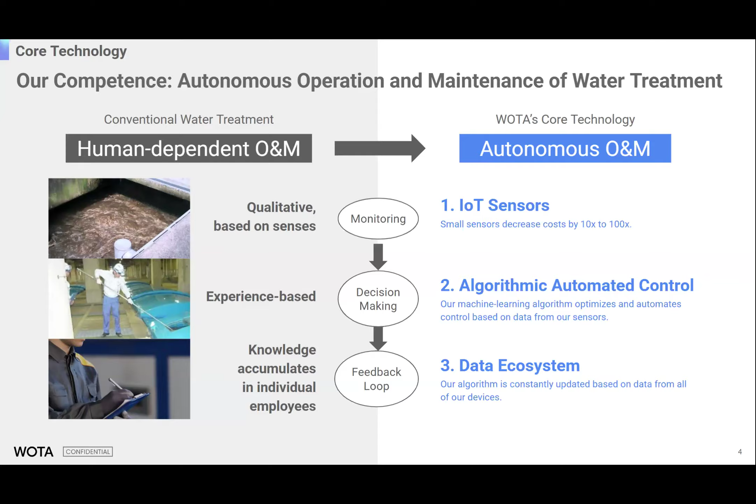We have two main business lines of products. One is for potable water business, and the other one is for residential water business. I will start with the residential water business because I think this is the focus today, but I'd like to take some time in the presentation to share also our experience with our potable water systems.

So in terms of residential water, we develop small scale water recycling systems. They are very small, the size of a household. They are designed at the moment to cater to the needs of a family, and a family in Japan is on average 2 adults and 1, 2, or maybe 3 children. So the capacity of our small scale water recycling system is around 1 cubic meter per day.

What we design is a system that has 3 different cycles. One for toilet water: the water from the toilet, the black water, is treated and reused for the flush only. Then we collect in a separated cycle the gray water, coming from the shower, the bathroom, the laundry, and also the kitchen. We treat it to a level that meets the Japanese drinking water quality standards, so it can be reused for the exact same usage, including the kitchen and the shower.

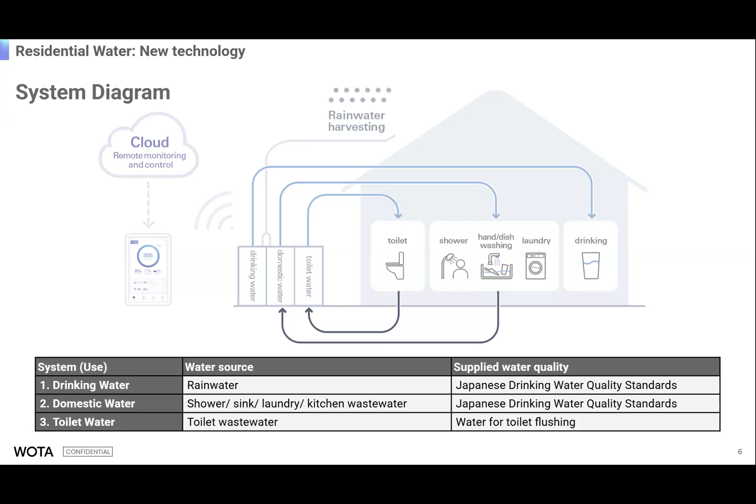And the last module, separated as well, is for drinking water. We use any source of water available near the house, mostly rainwater harvesting, but we can consider other sources like groundwater, or sometimes water coming from tankers. We treat it as well to meet the requirement for the Japanese drinking water standards. This is the concept of the residential system.

When I start with Japan, although the situation seems different from the Caribbean, it has a lot of similarities in some ways. Japan is a country with 125 million inhabitants, and out of them, 20 million, more or less 16%, live in cities with less than 100,000 people. In these cities, the cost of infrastructure is way too high compared to the water tariff, so it's very difficult for municipalities to maintain and renew the network, especially considering that the population in Japan is shrinking in many places.

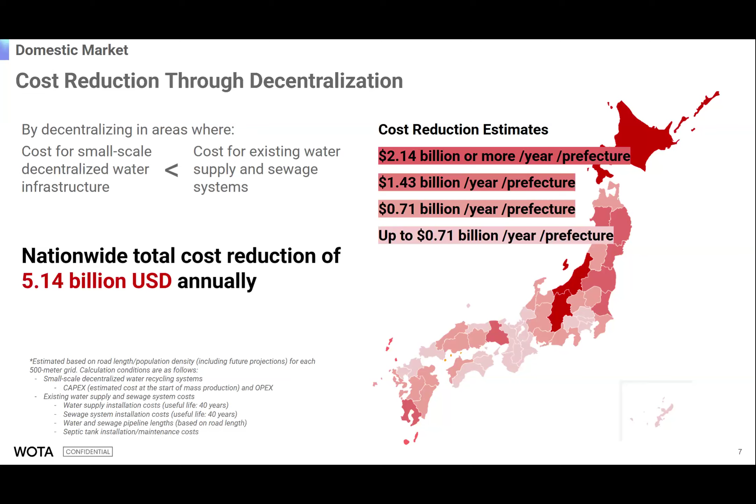So for those who have been in Japan, if you go out of the big cities, it's very rural and less populated. The cost savings we evaluated for the whole country can be more than $5 billion per year.

So those were the projects we are doing in Japan. We started to explore overseas. The opportunity we had is that we were selected by the Earthshot Prize, the Royal Foundation of Prince William, and this gave us the possibility to connect with many countries, including countries in the Commonwealth community. This is how we made the connection with the government of Antigua and Barbuda.

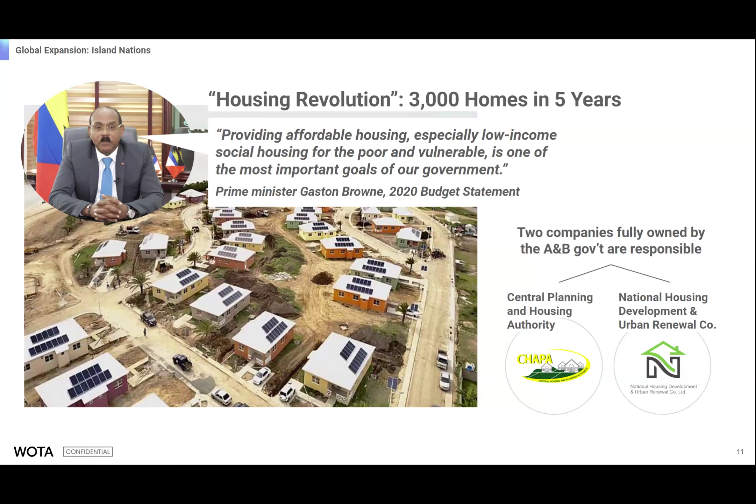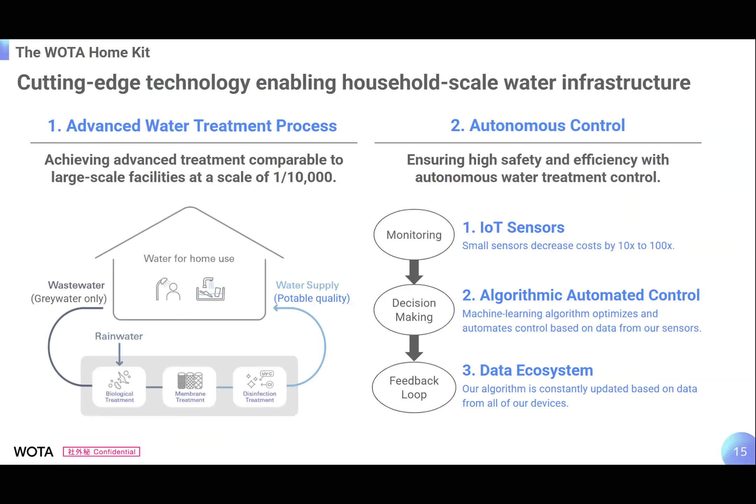In Antigua and Barbuda, we focus mainly on gray water. We haven't installed yet the system for toilet because it's a pilot, and we go gradually to make sure our solution fits with the configuration in Antigua and Barbuda.

The way it's installed: in Antigua and Barbuda, houses have cisterns that are very large, more than 5,000 gallons, used to supply water in the toilet and bathroom, and connected after that to septic tank and soakaway. But in many places, they face the challenge of working properly with the septic tank and soakaway, due to the nature of the soil.

So what we did is we adjusted to this local configuration. By using recycling of gray water, we expect to reduce the size of the cistern and the soakaway so the owner of the house can make savings on the cost of this equipment, connect bathroom and kitchen to our system, recycle, and just use the septic tank and soakaway for the black water coming from the toilet.

This is how we started the three piloting in three different houses. The first one has been in operation since July 2024, the second since November 2024, and the third in December 2024. I think Nerissa and Krista will be able to develop much more during the Q&A session for those three different pilots. But we already have more than 6 months of results in the first house, and also very encouraging results in the two other houses.

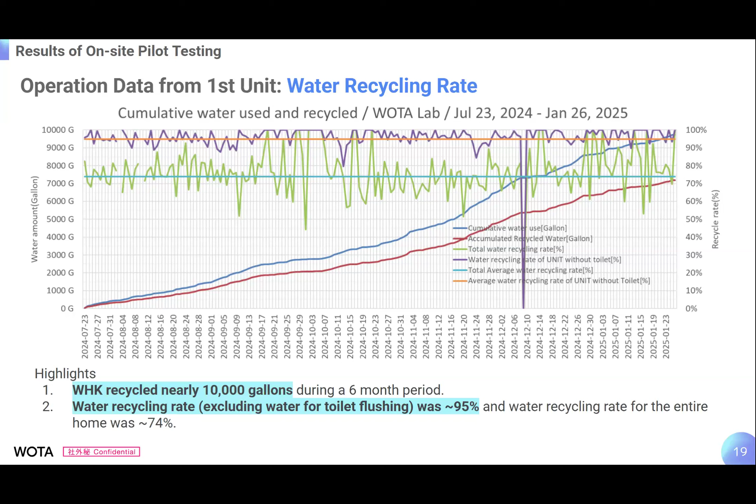We've conducted surveys since the beginning of the pilot, and very recently we extended the survey to, I think, many households. I will ask Krista later to confirm the number of houses, but we have a very strong interest. We were worried about the social acceptance of gray water recycling, but actually the interest is very positive according to the tests that we've done. So we are confident that the system would be adopted at a larger scale in Antigua and Barbuda.

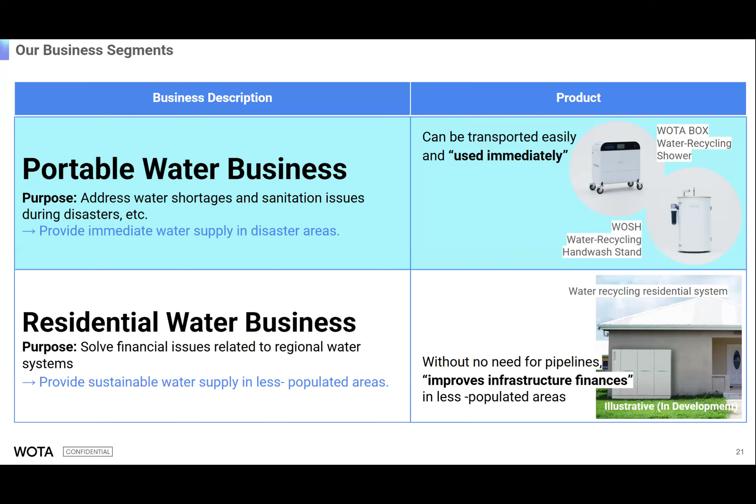Yes, that was for the residential water. Now I will move to the portable water business. As a startup, we always had this vision of using small-scale water recycling systems for residential use as a decentralized infrastructure. But to start, we addressed a very specific need in Japan with 2 systems for small-scale water recycling that are portable.

We developed, during COVID, this system called WOSH. The capacity is much smaller, only 20 liters, but you can recycle the water more than 500 times, sometimes until 1,000 times. It's a portable water circulation hand wash stand.

We used it during COVID because in many places you would have this need for hygiene measures, and we wanted to support the country's measures to provide a point to wash hands. It can also sanitize and sterilize the phone, because we use the UV lamp that is used in the treatment as well for sterilization of the phone.

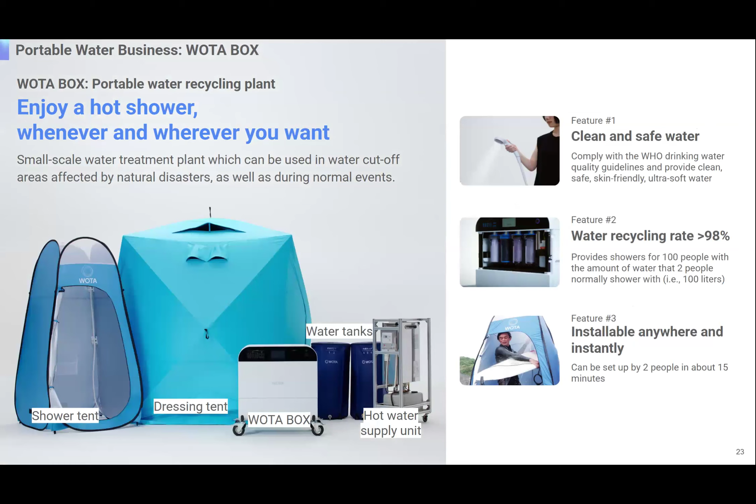We also have this system for shower recycling. It's a portable system that allows showers installed in tents to be used anywhere to recycle the water. The capacity is 100 liters of water that can be recycled 100 times. The treatment train for both systems is mainly filters and membranes, with sensors embedded in different parts of the treatment that allow the system to work autonomously.

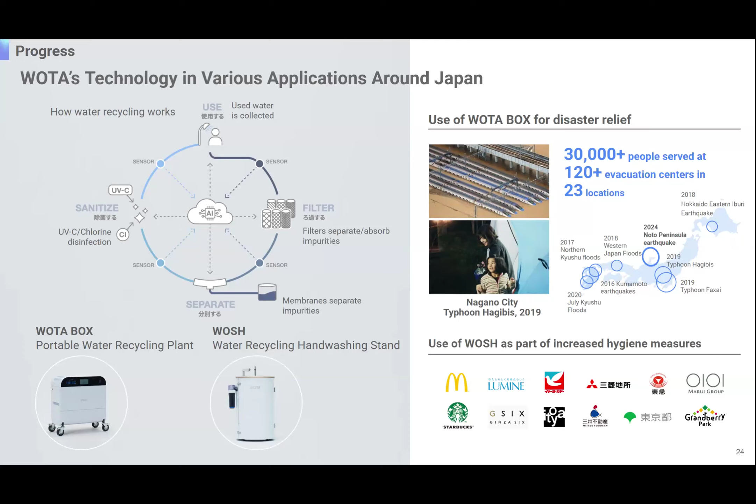The system has been used in Japan, mostly for disaster management. Japan, like the Caribbean, has many natural disasters - hurricanes and earthquakes - and unfortunately these create very strong damage on municipalities and infrastructure. Last year we had a major earthquake in the north of Japan on January 1st, in a peninsula called Noto Peninsula. The population there is around 300,000 inhabitants, and more than one third were majorly affected.

What we did is help the municipalities in their evacuee centers. We deployed 100 WOTA BOX systems for shower recycling and 200 for hand washing. We installed them in evacuee centers and in hospitals to help the evacuees. We think the first need during disaster management for evacuees is mainly drinking water and food, but the second is hygiene - important both for physical health and mental health. So we supplied our system everywhere, and we had a mission at that time.

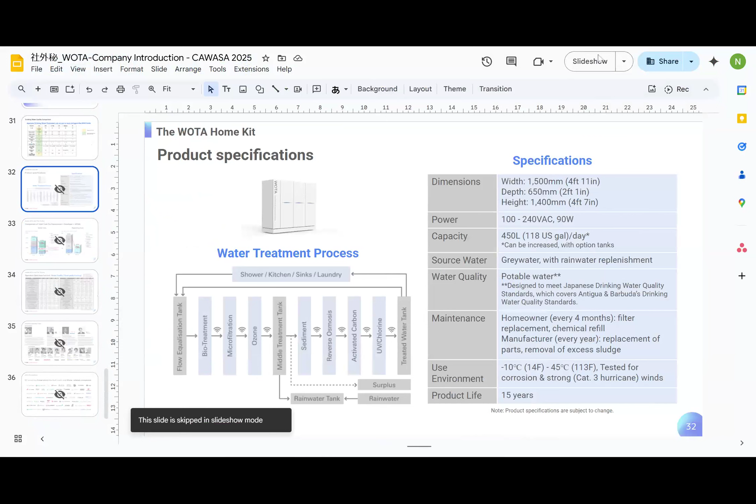Yeah, can you see the slide? Yes, yes.

So I'll focus on the treatment train for gray water recycling. We have the other module for toilet water, but the most advanced one is the gray water system.

We start with a collecting tank, which is a buffer at the beginning of the process. Then we have the MBR system, a biological treatment with a microfiltration membrane. Then we go to ozonation, a middle tank, and after that the reverse osmosis membrane. After the reverse osmosis membrane, we have activated carbon filters, and we sanitize with UVC and with chlorine. That's basically the treatment train.

At every step of the treatment we have sensors, different kinds of sensors. This is where we have the proprietary technology, so I cannot disclose too much, but basically we have sensors measuring different parameters of water quality - it can be pH, conductivity. We try to monitor how the bacteria are working in the biological treatment as well. We measure the chlorine to make sure the residual level meets the requirements of the Japanese drinking water standard. This is how we monitor both the performance of the system and the water quality.

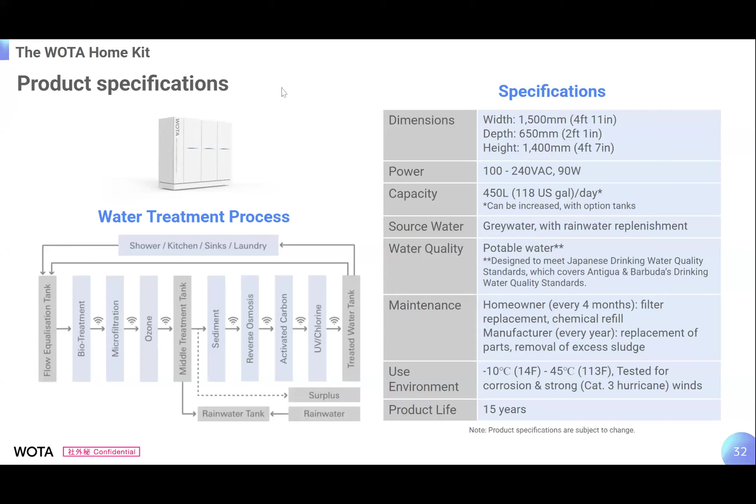Just to add to what Samir was saying, to ensure the local authorities are comfortable with the drinking water standards as well as the potable water standards, we work with the Department of Analytical Services, a team in Antigua, the local team from the government that checks the samples, and then monthly samples are sent over to Japan as well for additional parameter testing.

I put on the screen also the different samplings we did with some of the parameters. In the Japanese drinking standard there are 51 parameters that are followed. You can see the levels and the different parameters we had in the different samplings. We had a moment where some were over the threshold on chloric acid, but we solved the issue by changing the chlorine supplier.

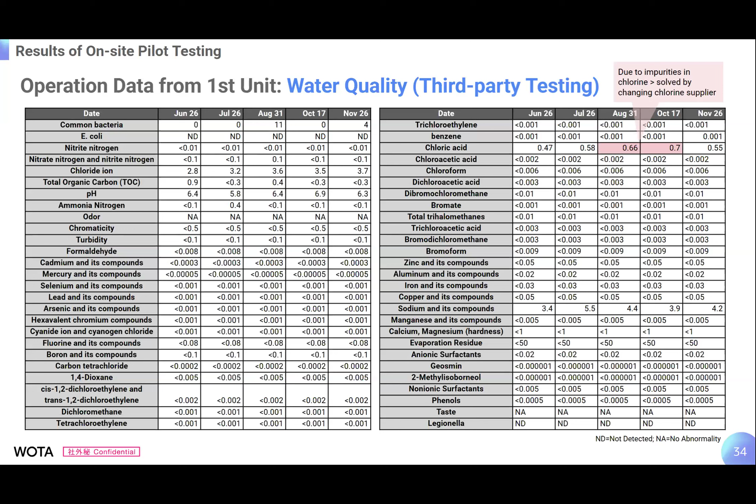Do you have any other questions? I'm not seeing any.

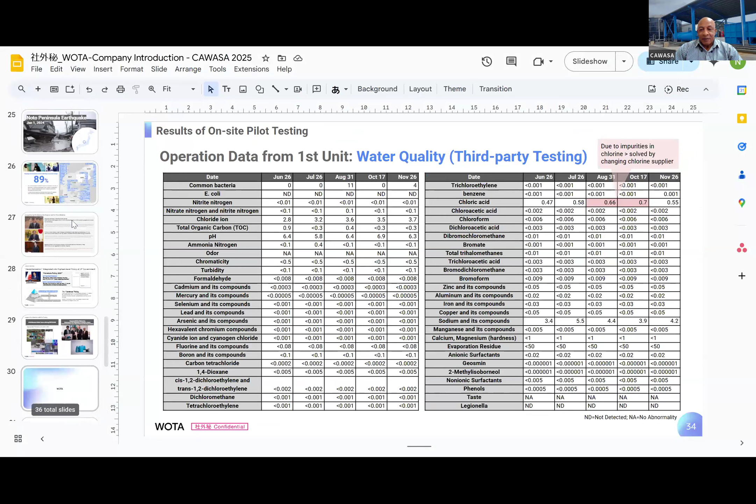In areas where you said you're completely off grid, how difficult is that? Is it that in some of those areas there are no connections to the utility? Are there any challenges with people getting total reliance on getting off the water utility system?

So we have different cases in Japan. First of all, we take a very different approach than the conventional one. What we try to do is develop a system that can be manufactured like a home appliance, and we expect that if we are able to find the market and produce more than 100,000 or a million of them, we will be able to reach a level of price that is affordable for everybody. So that's the approach - the idea is to save the cost related to infrastructure where the density of population is not that high.

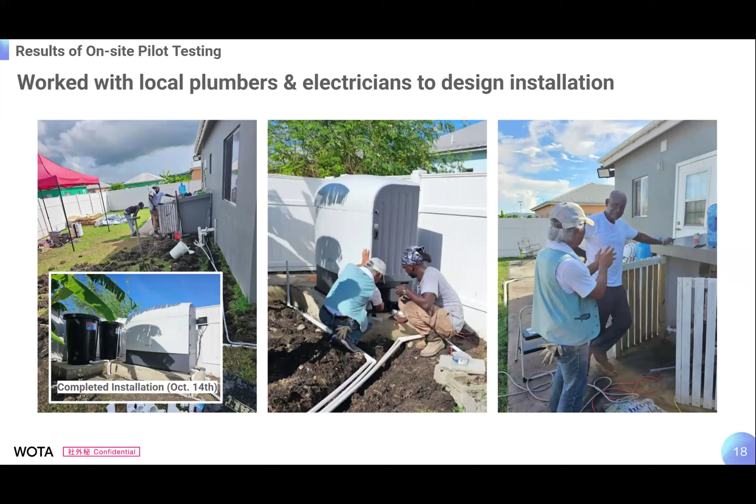I'd also want to add that the first unit we had the water system installed at is off of the utility's water and only has a cistern that takes rainwater in. We are also saying that the systems are compatible if you want to use a generator, or if you have solar panels on your homes. Samir mentioned that in Japan it also works for remote areas, and it's the same for the Caribbean. If there are homeowners interested in going more off grid or being more sustainable, the system works perfectly, because it can be retrofitted to existing houses and to other technologies such as solar, but it can also be added into the original design of a house when somebody's building.

Great, I like the flexibility of it. Thank you. Yeah, we have a question.

We have another question in the chat: does the off-grid system use wind, or I guess they meant also renewable energy in general? Yes, so it should be compatible with renewables.

Nerissa, maybe you want to develop about the energy consumption? In terms of energy consumption, the unit uses roughly about 700 watts, which is less than the average microwave right now, so it's very energy efficient. That's one of the things the company markets as well, the fact that it's also energy efficient and able to create this treated water to a standard that's drinkable.